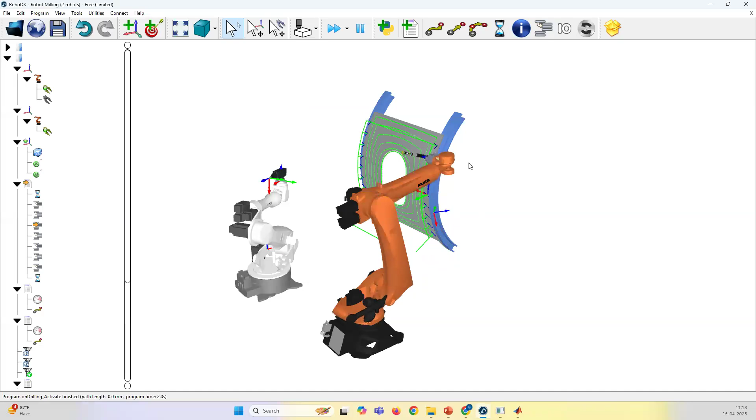These are some industrial applications. If I run this program, you can see it is doing a kind of painting operation. It is not sync painting.

If you see that color part, some kind of camera image process is going on. These are actually predefined programs. This kind of stuff you can easily show in the classes, so that everyone will be able to understand what is going on.

This software follows a step by step procedure. All the details are available on the YouTube channel of RoboDK. You can easily learn how to program this and other stuff. This software is also very much helpful to directly connect to the real robot.

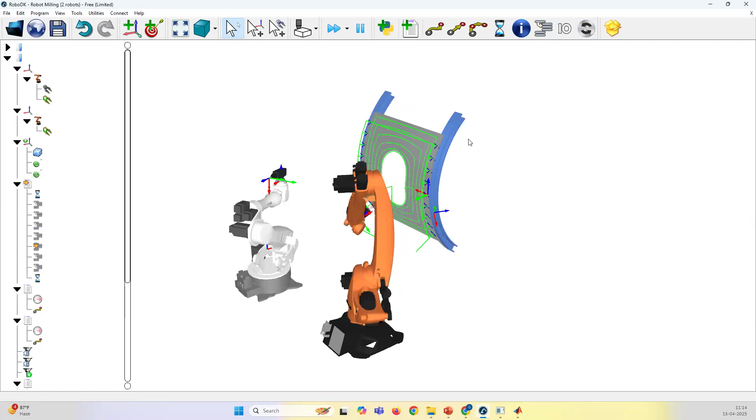Here you can see some kind of ethernet connections. With the help of that ethernet connection, you can connect this software to the real robot. So instead of using whatever programming language comes with the particular robot you purchase, you can generate whatever process you want and run it on that robot.

If you go to this particular website, once you click that link, it will directly take you there. Here you can see lots of brands and whatever industrial robots you want, everything will be available. You can easily download it and see how it works and other steps.

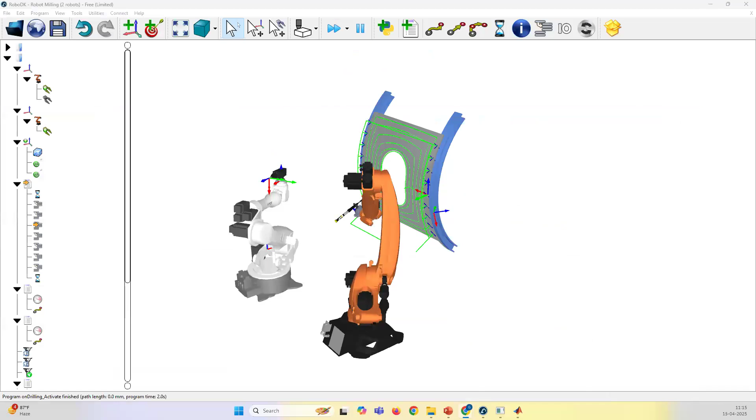Now we'll start with the robot kinematics part, why it is necessary and important. I hope all of you know the basic kinematics part. Kinematics is nothing but studying motions, regardless of the forces acting on them. In robot kinematics, it means studying the motions of robotic structure without regard to the forces that cause it.

It is very much necessary to understand how these motions affect the overall conditions of robotics operations. Before developing any robot, you have to understand how the robot's motions will happen. It involves mostly calculations of positions, velocities, and accelerations of each element, because a robot consists of some kind of links and joints.

It consists of links, joints, and has some kind of end effector. That is the most important thing. You have to understand how these links are moving from one position to another, how they are interconnected, and why it is necessary to understand the motions of that particular robot structure and how it will move.

This is essential for understanding how each joint and link contributes to the overall motion of the system. Then it will help you work with the control framework. Once you know the kinematics, you can derive the control algorithms out of that - you can develop the dynamics of robotics, then go for the control aspect.

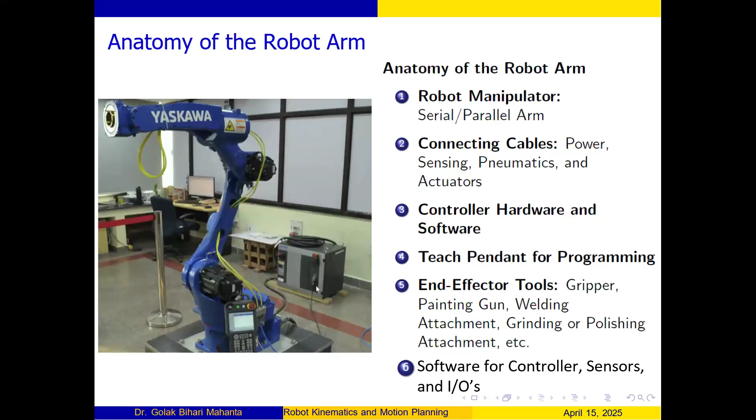So next, mostly these particular robots and everything come under this ISO - ISO 9946. Under ISO 9946, different ISOs are there for different aspects. So one is 8373.

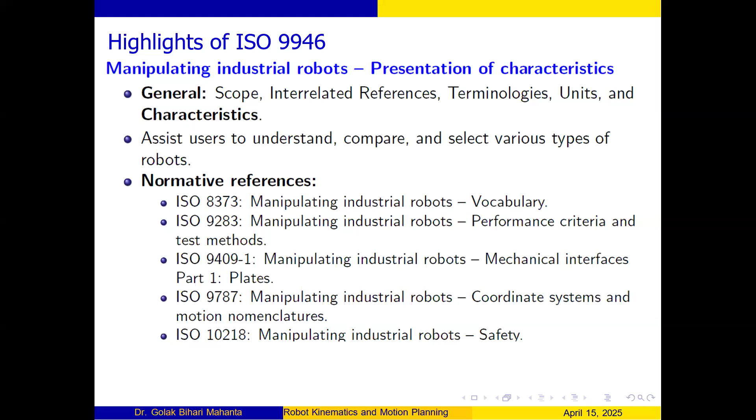All these related industrial robot definitions, all this vocabulary related to robotics, are put in this ISO 8373 standard. Just keep this part in mind.

The next most important thing is, when you purchase an industrial robot, it comes with a data set, and this is the most important thing to understand. You have to understand each and every component of this data set, then only you can understand what is happening in the industrial robot scenario.

So what is the meaning of this payload? The payload is nothing but the maximum weight a robot can lift in all possible configurations within the specified workspace.

If you see this industrial robot, it holds this particular object in different configurations. Whatever all the possible ways it can hold, it's not that if it can hold 30 kg here, then in another configuration it cannot hold that 30 kg. That's why all possible configurations in the specified workspace matter.

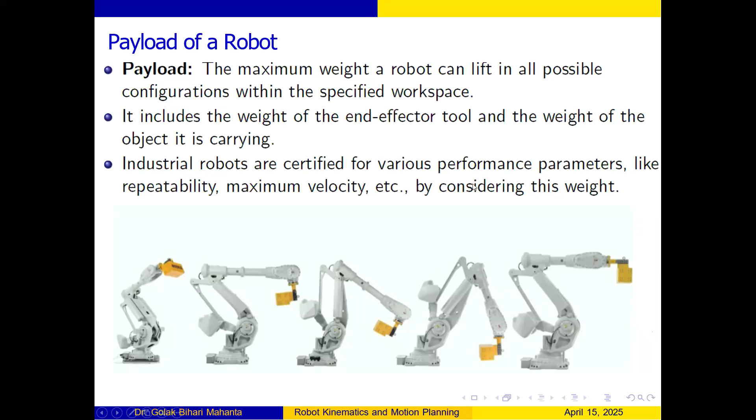Next is another thing called supplementary load. This is also mentioned in some cases. In this particular case it is not mentioned, but this supplementary load is also very necessary, and it is also defined in the particular data set.

If you add load elsewhere, what will happen? You cannot get the full potential of the robot, and some issue may happen.

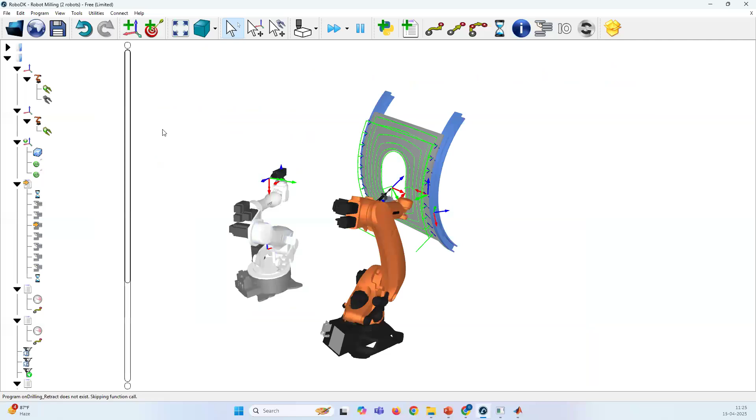Let me go to this station. If you see, this is the number of axes. Here it has 6 axes. This is my first axis, if you see this.

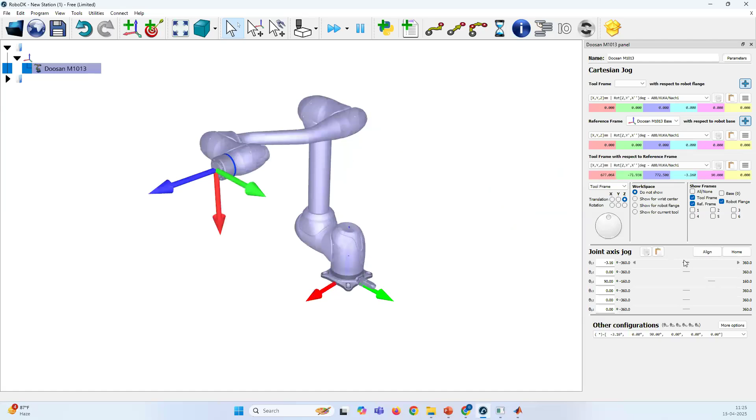This represents RGB, meaning red is your x axis, green is your y axis, and blue is your z axis. The first joint is at the base, and it rotates with respect to the z axis. This is the first axis or first joint, because this is an articulated robot arm, all joints are rotary joints, and a rotary joint has 1 degree of freedom.

Rotary joints have 1 degree of freedom. If you imagine any object in space, it can have maximum 6 degrees of freedom, meaning three directional linear motions like X, Y, Z and three rotational motions. For a rotary joint, the remaining five degrees are constant, so a rotary joint only has a single degree of freedom.

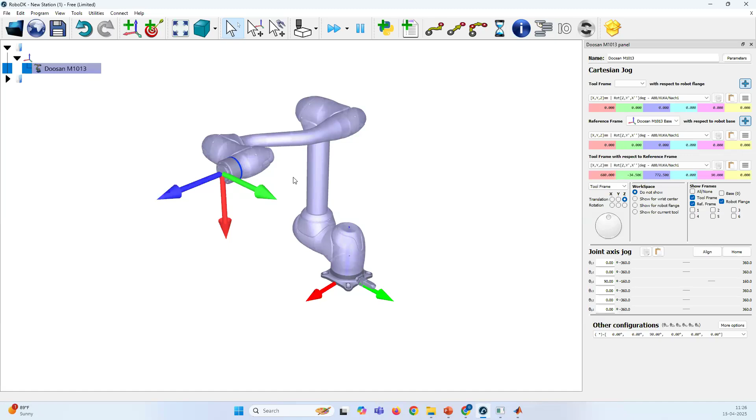This is my first axis, this is my second axis. It rotates with respect to either the y axis or this rotates with respect to the x axis, and so on for the third, fourth, fifth, and sixth joints. Each joint represents one degree of freedom, so this is a 6 degree of freedom robot because six joints rotate independently, irrespective of each other. If I rotate this joint, the other joints don't move, because we are in the Cartesian frame. That's the degree of freedom part.

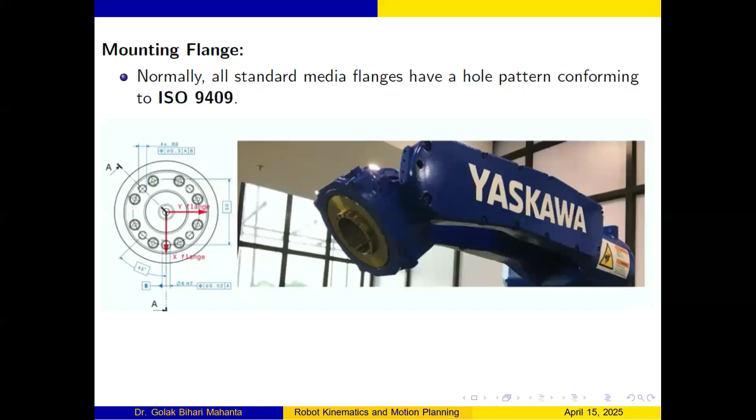Next we'll discuss the mounting flange, which is also one of the most important things. This follows the ISO 9409 standard. Whatever robot you purchase, if you look at the end effector part, it has to follow this ISO standard, because robot manufacturers usually don't develop the end effector themselves—different companies make end effectors. Those who have robotics in their lab can experience this. They have to follow the standard so that whatever end effector you use can attach to this particular flange. Everyone has to follow ISO 9409 when developing this.

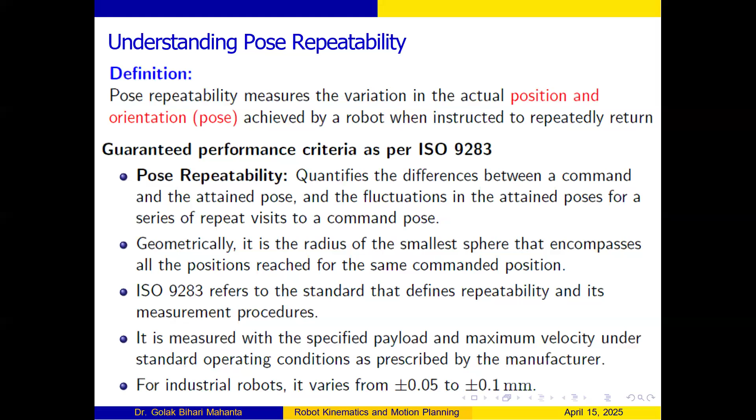Then the next important thing is called repeatability, or pose repeatability. Pose repeatability measures the variation in the actual position and orientation achieved by a robot when instructed to repeatedly return to a particular position. Imagine I want to take my robot to a position XYZ where the target is 100, 200, and 300. It has to reach that point, but initially, on the first iteration, it might reach 99.9 mm instead of 100, 201 instead of 200, and something else instead of 300.

In the second iteration it reaches another nearby point, and in the third iteration another nearby point. So it's continuously reaching nearby positions. If you take a small radius around all these end effector positions, they will form a kind of sphere. The minimum radius of that sphere, covering all these reached positions, is nothing but the pose repeatability.

This measures how accurately the robot can reach a particular position, so every robot comes with a repeatability specification. For example, for Fanuc, the repeatability is plus minus 0.05. Lower this value, the more accurate it is compared to a higher value. This is pose repeatability, one of the other important aspects of this subject.

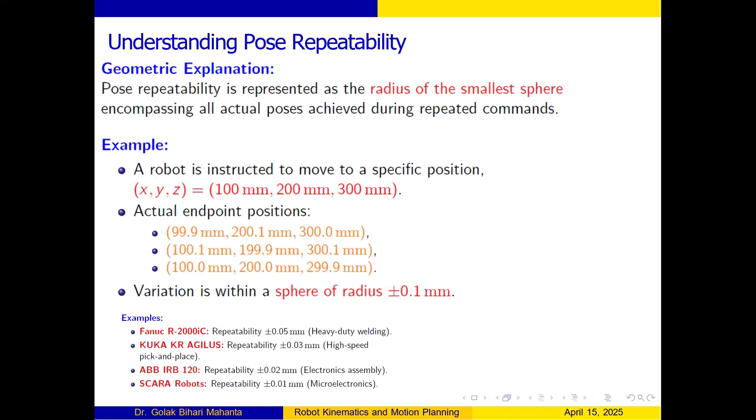The next thing is called mounting position, which is also defined in the specifications. You cannot mount the robot haphazardly—whether you mount it in a vertical position, horizontal position, on slotted devices, or in some other application, this is also mentioned in the specifications.

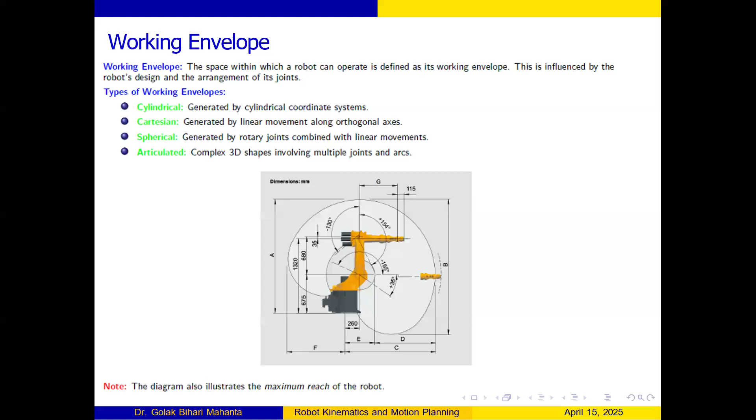So if you see here, some constraint will be there. Here it is a kind of cylindrical work envelope developing, and at the back, due to the physical limitation of this robot, you are not able to reach the back side. Physical restriction is the most important thing, because the joint is like your hand, which is also a kind of rotary joint, so you cannot take it to the backside.

If you cannot close it properly, maybe it can navigate from 10 degrees to 180 degrees. If you take it to the backside, it will break your hand. So that restriction is very important - physical joints cannot do this thing. So let me show this particular simulation again.

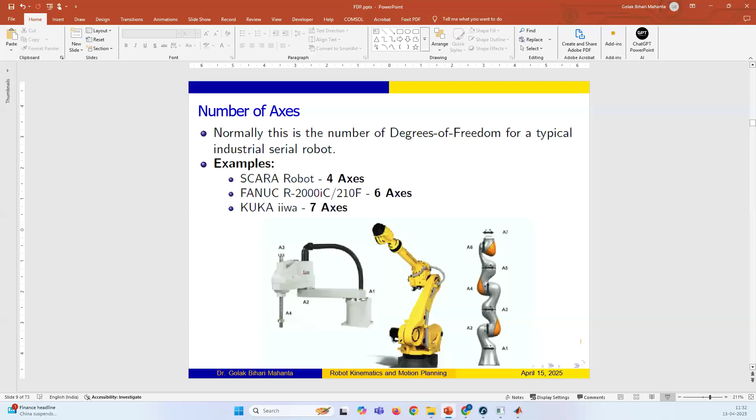So this is a 2 degree of freedom robot. If I say what is the configuration space - for all values of theta 1 and theta 2, what space will be generated, the end effector will be going to generate what is the maximum work envelope or work space it is generating.

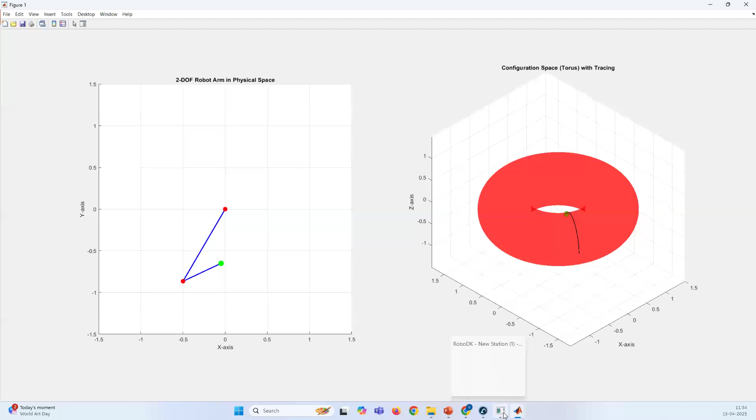So I'll stop it here. In this case, it will generate this kind of shape for this particular robot. How do you do that? While you code that in MATLAB, you have to take the physical parameters of each of these things, develop the forward kinematics equation, give the loop, and you can plot that tracing part, so that you can easily get that.

Next thing will be the key differences between work envelope and work volume, because it's always a kind of confusing thing. In interviews they often ask what is the difference between work envelope and work volume. Work envelope is nothing but a kind of two-dimensional space, the maximum it can reach with no restriction at all - a geometric shape defining the boundaries, typically visualized in two-dimensional space. All the reachability boundaries can be denoted by this work envelope. But work volume is the three-dimensional or operational space within the boundaries.

So if we develop the overall work envelope, I can say that it's like a kind of circle shape. But the work volume will be exactly like this.

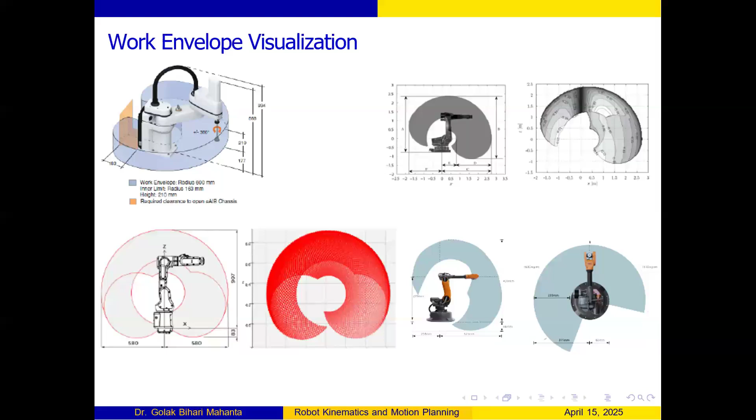This is operational capacity. Next, you have to understand all these particular specs are rated by ISO 20653, that is for your ingress protection. Means if you see ingress protection rating like IP65, while you go to buy anything, this is a kind of waterproofing condition.

So in this particular case they follow IP65, meaning totally protected against dust, because a lot of dust and other stuff will be there, and some protection against low pressure water jets from any direction with limited ingress. So it means you cannot put that underwater, but different kind of actuators can go for underwater application, though they have to follow different ingress protection.

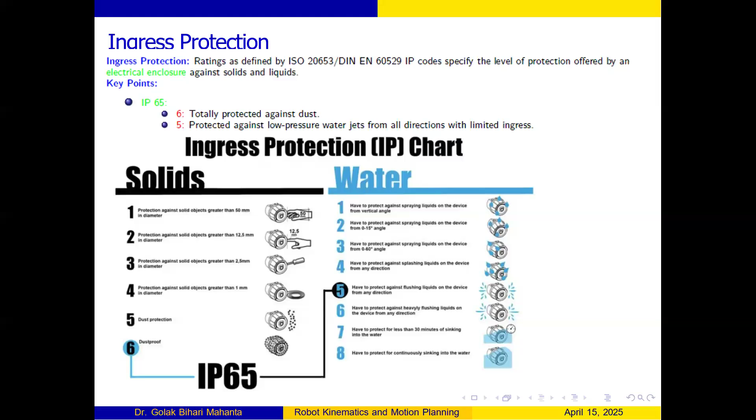This IP65 they have to follow, and depending upon the motors and other stuff, they can go for different IP ratings, similar to your smartwatch, where they say waterproof IP6, IP7, IP8. So this is for both solids and water, you have to account for both.

Next thing will be your axis data. Axis data is nothing but each joint going for both positive and negative parts. Like if it's moving clockwise you define positive, if anti-clockwise you define negative. So you have to specify in which side plus and minus everything goes.

And you have to calibrate each and every joint whenever the robot comes, like this is my joint 1, this is my joint 2, then you have to calibrate these things before making it run, so that there will be no issue.

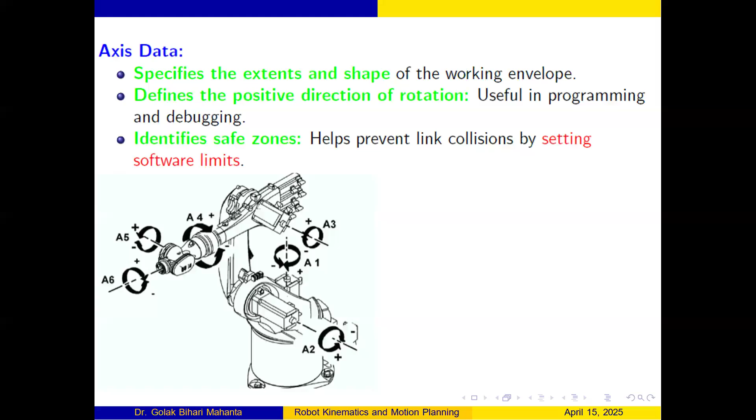Next, this configuration space we already discussed and visualized. Configuration space is nothing but where is that particular thing, where is your robot. You have to know that in detail. Just imagine a door, if you're going to open that door, what variables do you need to define the position of that door?

Maybe 0 degree means it's closed, 90 degree means it's open. So in that case you need a single variable, that is your angle. So this configuration space is nothing but the angle of the hinge, the angle about its hinge.

Then just imagine a point. How do we define a point? To define a point we need x and y only, so much in x axis, so much in y axis.

But if it's an object in a two-dimensional plane, you need x, y as well as another theta value for how it's oriented. Then if it's in a three-dimensional space, you need x, y, z as well as theta 1, theta 2, theta 3 - three positions, three orientations.

Similarly for this planar robot, you can define it in the form of joint angles theta 1 and theta 2. Same thing for this particular robot's configuration space - for these two joints it's s1 and s2. This forms a torus. For theta 1 it's configuration space s1, and theta 2 another, s2. Both together make a torus.

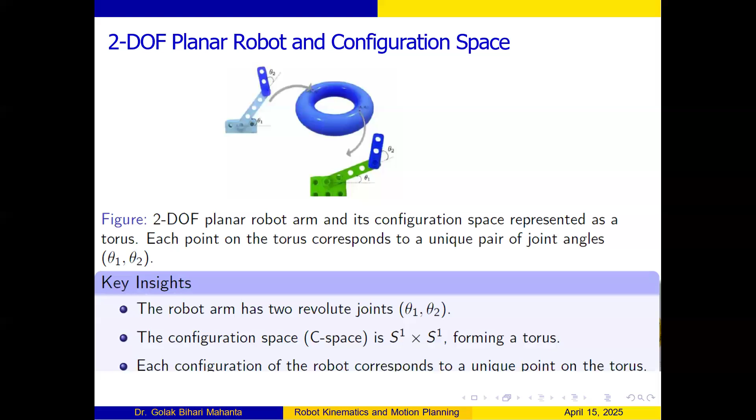Then what are the components to develop the configuration space? Degree of freedom is the first thing. Degree of freedom is nothing but the number of independent parameters required to uniquely define the configuration of the system.

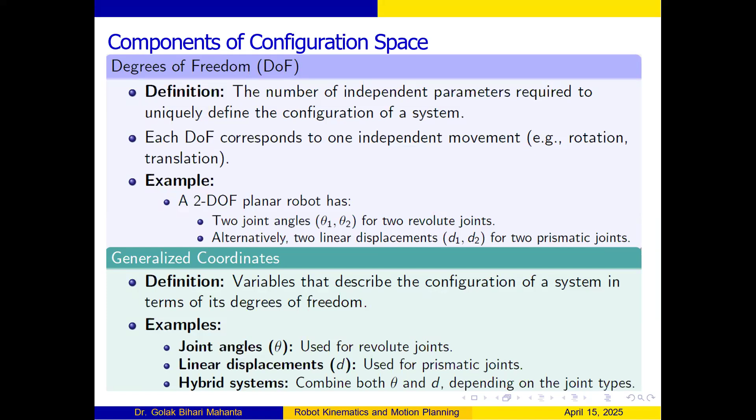This is another thing interviewers usually ask about in detail. They go into the depth of this particular degree of freedom topic and try to extract as much as possible, so let me show you each and every scenario.

These are the types of joints generally used in various scenarios. One is the revolute joint, denoted by R. Then the prismatic joint is P. The helical joint is H, also called a screw joint because a screw will be there. Then cylindrical joints, which have no screw at all. Then universal joints and spherical joints.

The revolute joint's degree of freedom is one, because it only rotates with respect to the axis where the joint is placed between two links. Then there are prismatic joints and helical joints. This is the most commonly asked question - the helical joint's degree of freedom is also 1.

For the revolute joint, degree of freedom is 1, meaning it independently rotates in one axis only. It cannot rotate in any other axis, whatever that axis may be. Suppose you put that joint vertically - let's see what that means.

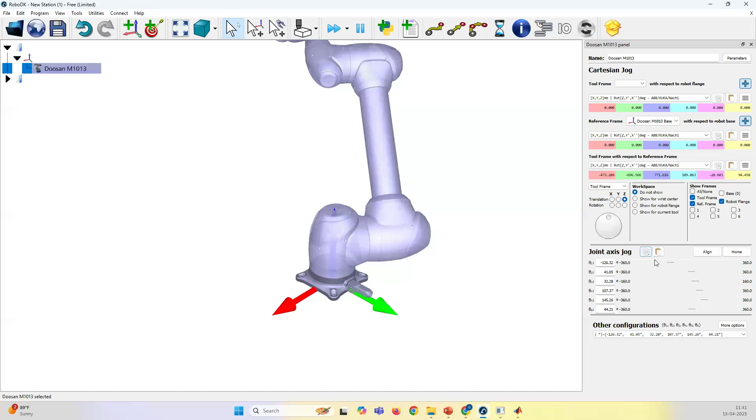This is a rotary joint. If you see here, it is placed with respect to the z-axis, so it rotates only with respect to the z-axis, not any other axis. This particular joint, shown in red, is the second axis, and it rotates with respect to the x-axis. It cannot rotate anywhere else - you have to understand this very clearly.

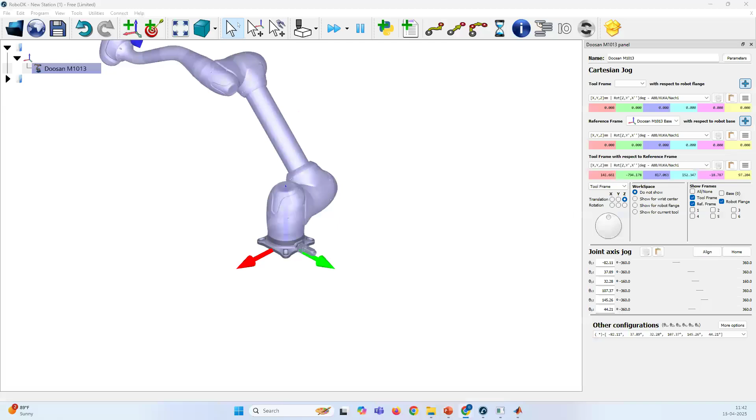Let me show you another scenario. Let me go to this website to see how we do that. Suppose I want to work with 4 axes - if you see, there are different robots available. I'll add one, maybe a Scara robot or something. I simply download it or directly open it. So, open in RoboDK - it will open, and this is my robot.

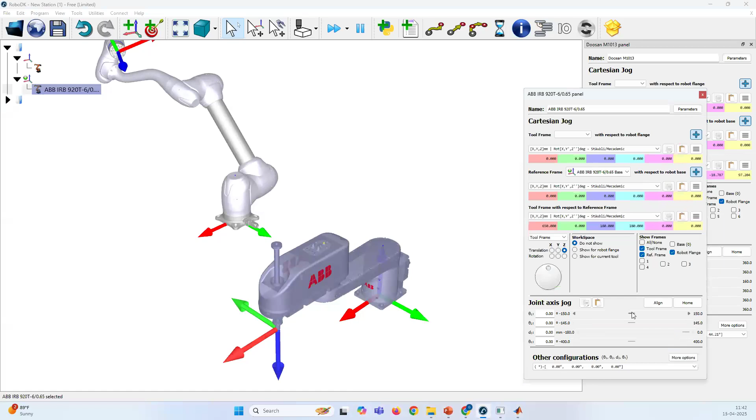In this case, let me click on this - this is my robot, and it has 4 axes. This is my first axis, this is my second axis, theta. But if you see, what does the third one have? It is which kind of joint?

This could be either a cylindrical joint or a helical joint. Mostly it's a helical joint, but since there's some kind of screw involved, what happens in helical joints? The degree of freedom is 1, because independent motions aren't available - the thread has minimum pitch. So if you rotate once, it can travel up to 1 centimeter, that's the minimum pitch, so independent rotations aren't possible.

That's why this is called degree of freedom 1. Everyone remember, helical joints have degree of freedom 1, and you can easily demonstrate that. The fourth and last one is the end effector part, which is again a rotary or R kind of joint - this is why the degree of freedom concept is very important.

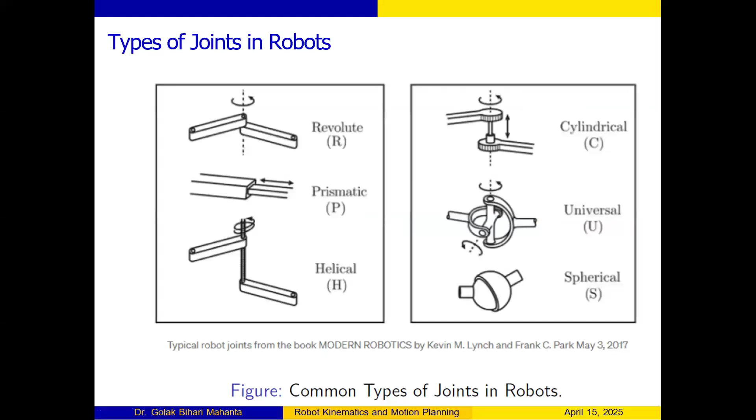So the next thing will be, let's go through that. I already defined the links and joints and the other stuff, so you can go through that.

Next thing is how to find out the degree of freedom. In robotics, we generally use Grubler's formula to find the degree of freedom. It is denoted by m into n minus 1 minus summation of ci or fi, whatever you want to call it. So m depends upon which plane you are doing - either a two-dimensional plane or three-dimensional plane. If it is a two-dimensional plane, we need minimum 3 parameters to define that thing, so m becomes 3. n is the number of links, and j is the number of joints.

Here another stuff will come in. In this case, ci is the constraints imposed. If you put the constraints imposed, the j part will also come in, so the expanded formula will be this one: n minus 1 minus j, summation of fi, meaning independent degree of freedom - this is the summation of the degree of freedom of each and every joint.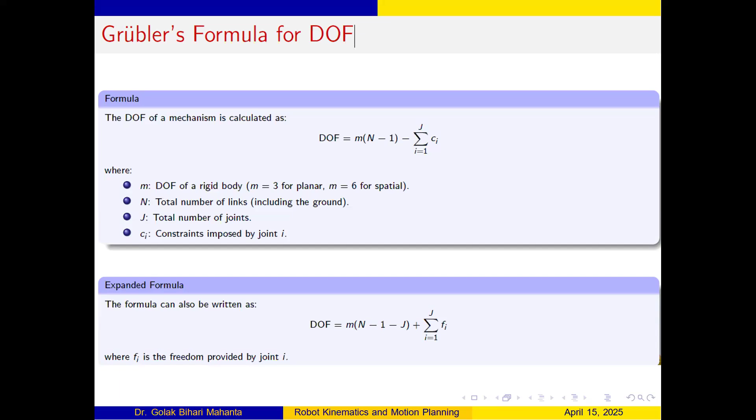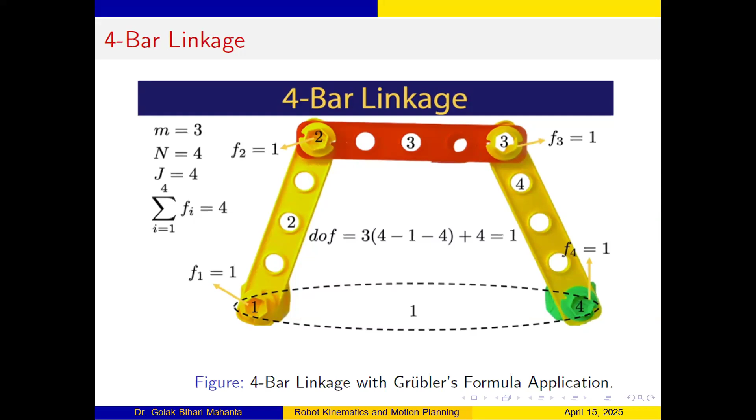Next thing, this is another theory of machines question, like a 4 bar link mechanism. Here how many links are there? The base is one link, second link, third link, and fourth link. How many joints are there? One, two, three, four joints, and all joints are revolute joints, so 1 degree of freedom each. The summation will be 1 plus 1 plus 1 plus 1, which is 4. If you put that in the formula, you get the degree of freedom equal to 1.

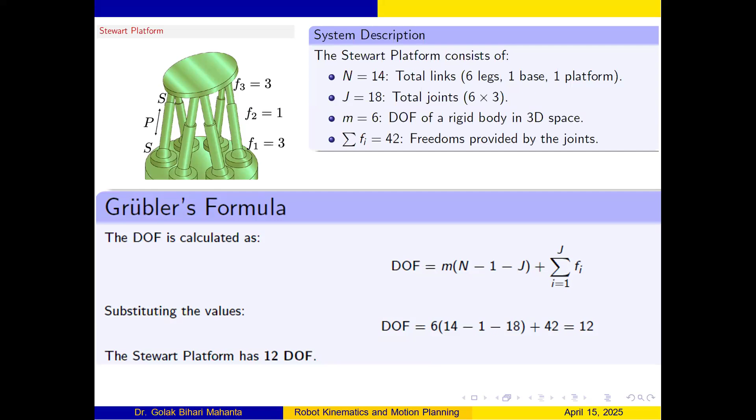Next we're going to discuss the kinematics part. In robot kinematics, mostly two kinds of kinematics are there. One is called forward kinematics, second is called inverse kinematics. Forward kinematics is to find the position of the robot, then inverse kinematics is to find the position of the joint angles.

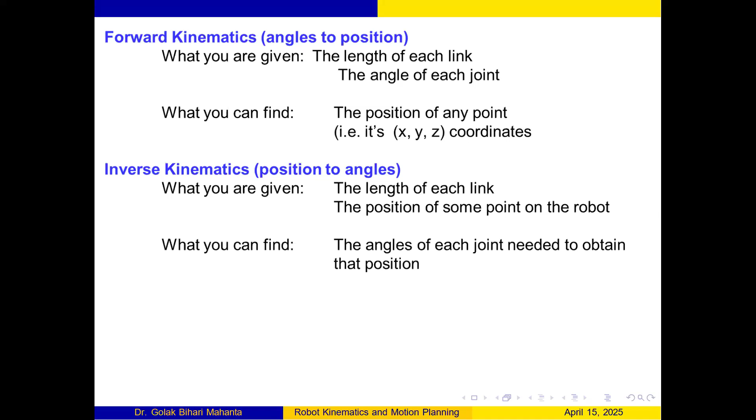So in the forward kinematics equations, you have to find x, y, and z, and your known conditions will be length and angles. But in inverse kinematics it is the other way around. So how do you find this particular thing?

You have to first know about all these parameters, then find out the DH parameter representations, because next will be finding the kinematics equation. Then you can easily, once you multiply each transformation from 0 to 1, 1 to 2, 2 to 3, and so on, find the final end effector position and orientation.

So it will come out as a 4 by 4 matrix. Out of that 4 by 4 matrix, the 3 by 3 matrix will represent the orientation, and the position will be px, py, and pz.

So in the DH parameter algorithm, first, this is mostly used for industrial robots and was developed around 1955 or so. Later, advanced methods came, like screw methods and exponential equations methods which we generally use now, but till now for teaching purposes we mostly follow this DH parameter notation. This is also there in the syllabus of engineering services examinations, the DH parameter part.

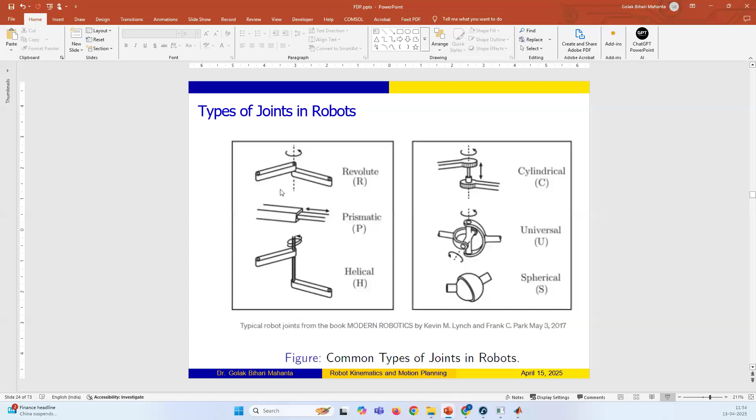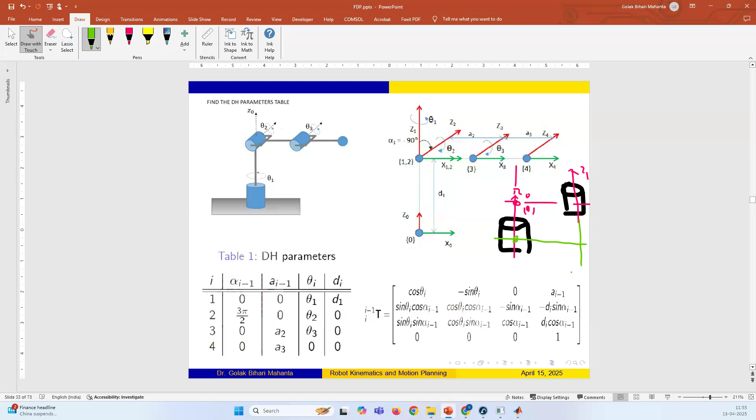You have to try to remove this mistake. A lot of people make this mistake, so you have to understand that this particular reference point should be at a joint. Instead of doing that, you extend this position like this, extend this position like here. This is my reference point. If we take this reference point here, then you can easily see it is at one joint. This is a basic mistake a lot of people make while assigning the axis.

Similarly, in the second scenario, let me go through with my mouse. In this case, this is my Zi going like this, Z i plus 1 is like this. So at which joint is it? It is at the zi plus 1 joint. But even though it is at the zi plus 1 joint, you have to locate oi here. Oi means whatever the zi value is. Suppose this is your z0, this is your z1, then this particular point will be your o point, meaning the 0 point. This part will be the 0 point.

Don't assume that because it is in one line, the z1 line, you should write it as one. It will always be between the previous and the new one. If it is z1 and z2, this point becomes 1, because if it is z2 and z3, this point becomes 2 when you do the numbering. Similarly, you can go for the other one.

So if it is parallel, you have to draw a common normal and put the point in that common normal. Then if both are collinear, you can put it anywhere, but try to put that at any of the actuators or the joints.

Once this is completed, you have to assign the x-axis part. One case is when both axes are intersecting with each other. If intersecting, you find the plane created by the intersection, and it will be perpendicular to that line. So if you see this axis and this axis intersecting, it creates a face here, and you draw a line perpendicular to the face.

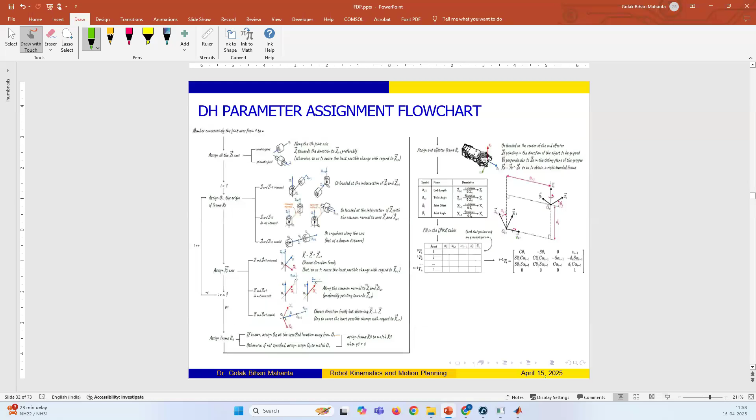The twist angle is nothing but - I'm going to show you, because a lot of people get confused related to this twist angle. So what is the meaning of twist angle? This is a valid point, it is like an initial... yeah, so this is the twist angle part.

So twist angle is nothing but, this is one joint. This particular joint is arranged vertically, this is arranged horizontally. So what is the angle between these two things? If you see, imagine the angle between these two things is 90 degrees, but you have to follow the right hand thumb rule. You have to check, if I rotate this particular axis, how much angle it will take to make it parallel to this one. That much angle, and it is an imaginary kind of thing.

Don't think of it as something different. Whenever you go to purchase, fabricate, or create this, you have to decide by yourself how the joints are angled.

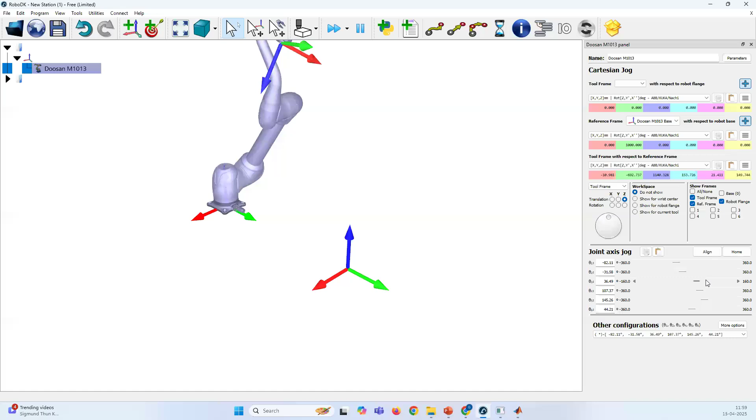In this case, joint 1 and joint 2 have twist angle 90 degrees. This is my joint 2, and joint 3. So here, the twist angle will be how much - both are parallel to each other, so twist angle will be 0. It is not rotating.

So if you see, even if I bring this here, this is my joint angle 2. So both of these joints are parallel to each other, which means your twist angle will be 0.

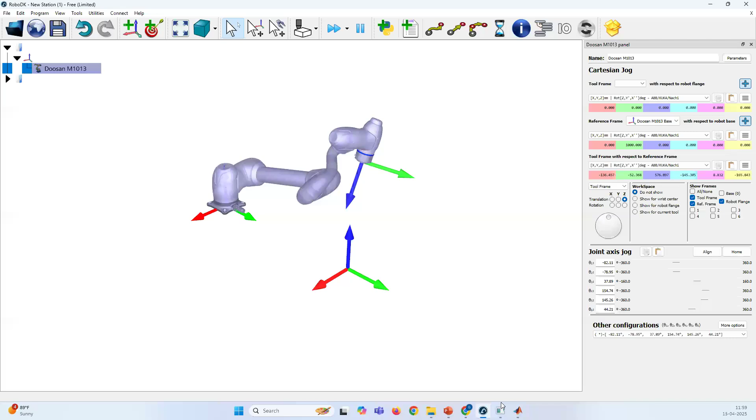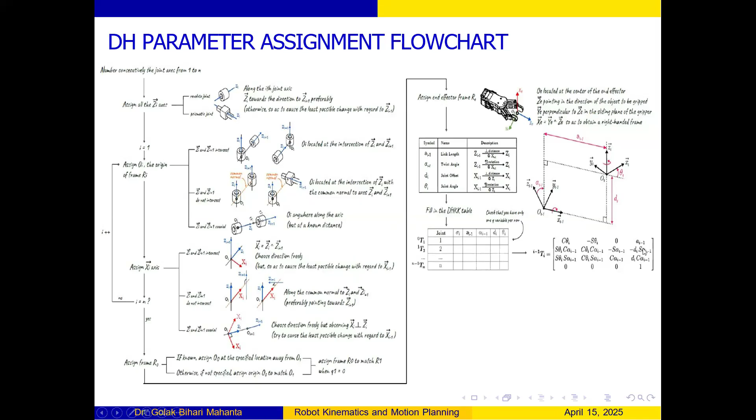From each and every table, you can get, like, from 0 to 1, one transformation. You will get one transformation like this. In this case, this is a basic RRR configuration part.

Once I did everything, I gave z0 here, for the base point where the robot will be placed - you have to put that robot in some place, so that is z0. And for this particular blue color part, I gave this as z1, and it is, you can extend up to this point.

For this second joint, this is Z2. For the third joint, Z3. And the fourth point is nothing but there is no joint at all, but I can show that for the end effector I just draw that Z axis for Z4.

Once this assignment of Z is completed, you have to assign the origin points. If Z0 and Z1 are collinear, I can write the point here, point 0. Then for Z1 and Z2, they are intersecting, so point 1 is here. Then Z2 and Z3 are both parallel, so if I draw a line there, point 2 is the starting point here. Between 3 and 4, the starting point is 4, and the fourth one is our point. So this point assignment is completed.

Then you will draw the x-axis. This is my Z0 part, so I can write one axis here. Between 1 and 2, this is making a plane, so x1 will be like this. Between x2 and x3, directly you can draw x2 here, then x3 here, x4 here.

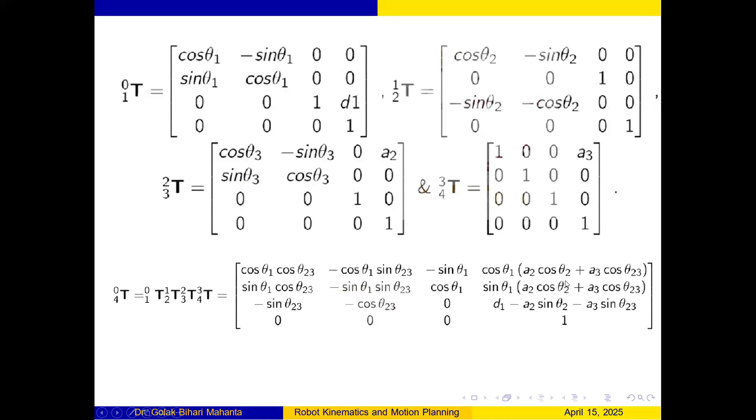So this is nothing but the forward kinematics value. Using this particular forward kinematics value, you are able to develop the workspace also.

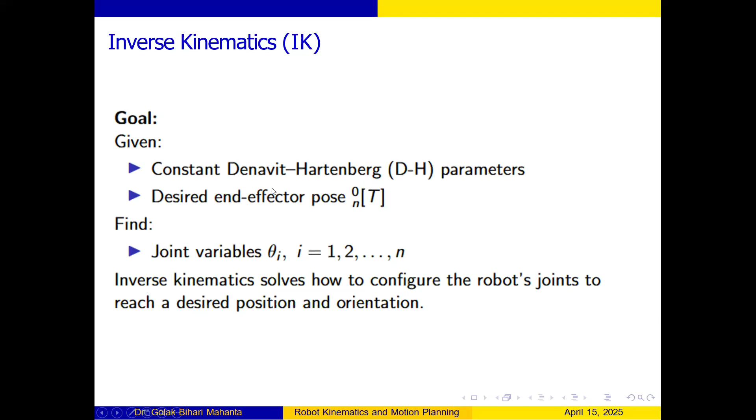Then the next thing is the inverse kinematics part. In this particular case, we have to find out the joint angle, provided your x value, y value, z value, as well as link length will be given. So you are able to find that.

And for different applications, necessary things like path planning, pick and place, and other stuff will be there. Then how to find different solutions will be there.

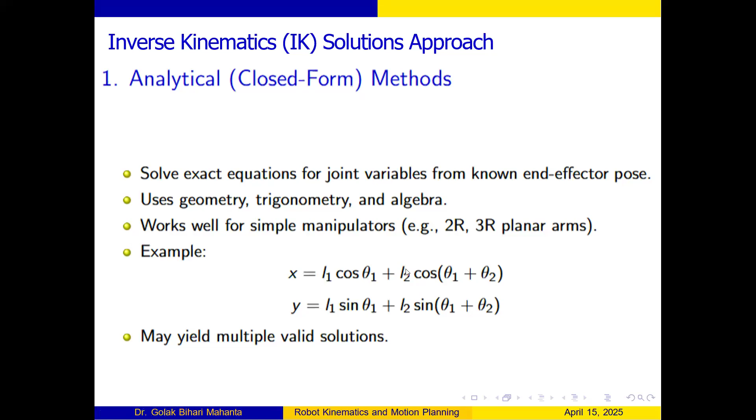So one is the analytical approach. In analytical approach, how will you do that? You can solve these two equations. Here two unknowns, this is known, L1 and L2 known, theta1 and theta2 unknown. So once you solve this, you can get two values. One will be theta, and the other you get from cos inverse of this.

But in this case, we get two values for each, theta1 and theta2. If you see, like cos 90 degrees, cos minus 90 degrees, 45 degrees, minus 45 degrees, we are getting two corresponding values. This is my bottom kind of condition. So in this case, if I draw like this, another condition I will get.

So that's why multiple values will be obtained in inverse kinematics. That's why the inverse kinematics part is very complex. For particular applications, if you want to develop some robot or something, there are a lot of papers or research articles you can get, with lots of people focusing on different approaches to solve this. These are the standard kinematics parts.

Then some pros and cons I mentioned. Exact closed form solutions, very fast computation you can do, suitable for real time control. But it is not applicable for complex geometries because it is very difficult to develop for complex geometries.

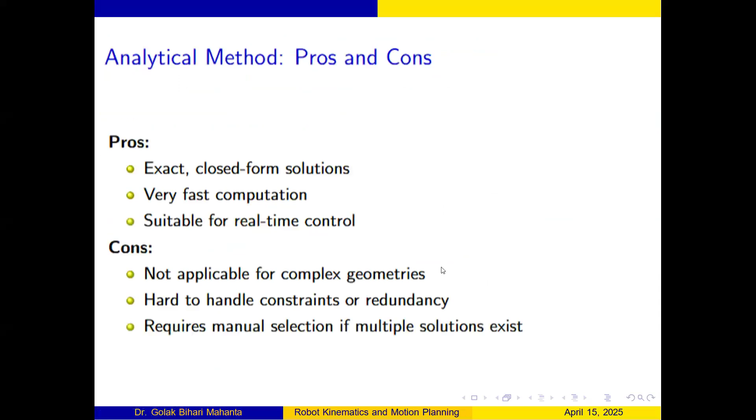And then next is iterative methods, or numerical methods. You have to use some kind of form called Jacobian based approach. We're going to discuss what this means. And then Jacobian method or Newton-Raphson method. Any mathematical approach like iterative numerical methods you can use here, numerical mathematics you use to study, that approach you can use.

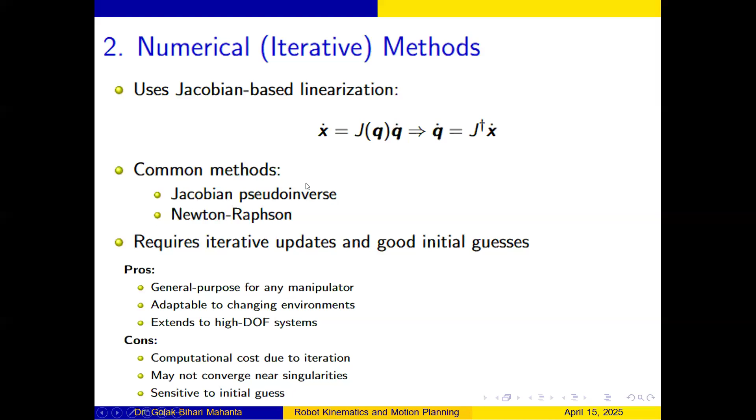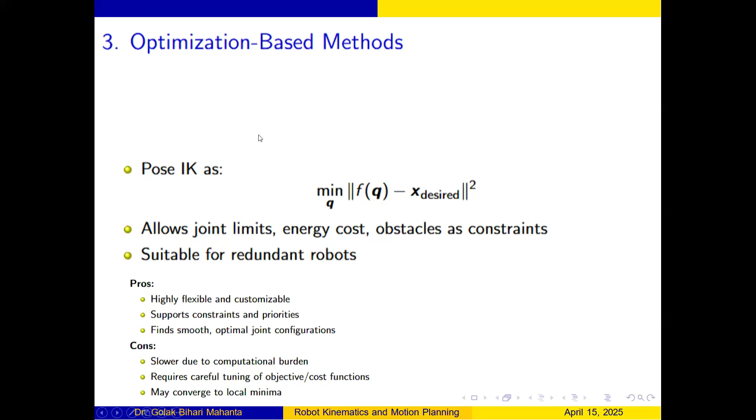Then there's the optimization based method. In this case, you already know the forward kinematics value, then whatever the desired value you are getting, you have to minimize that with respect to some optimization method. So you have to develop an optimization function, then you can minimize that using any of the methods.

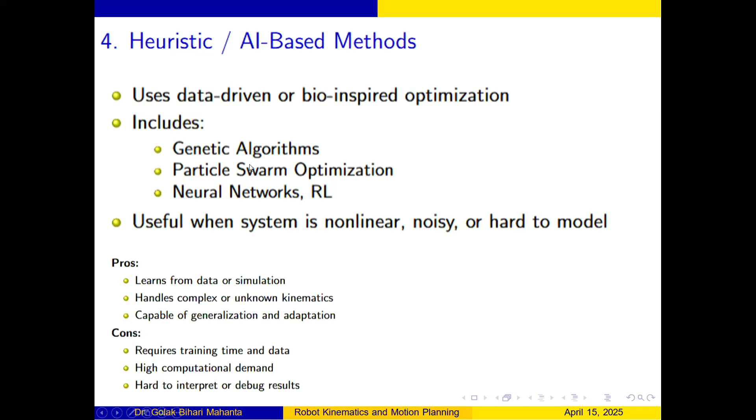Then some kind of heuristic or AI based approach will be there, like genetic algorithm, PSO, and lots of papers. You will get a lot of papers based on these AI methods and other stuff, so you can explore that part.

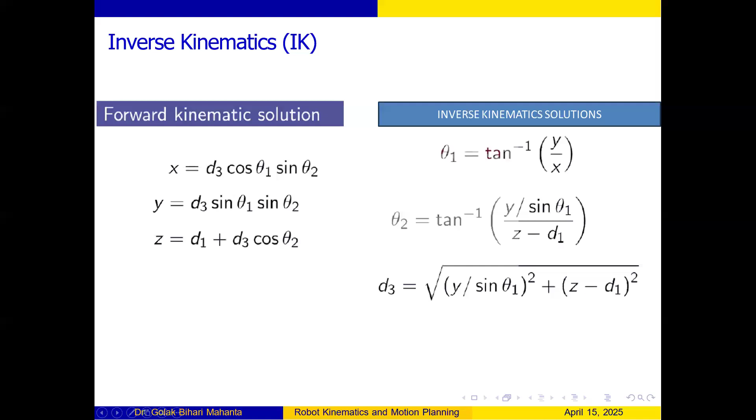For the inverse kinematics part, again the same thing you have to follow to find out the forward kinematics. Once you complete that part, you will get px, py, pz. Based on this particular data, this is nothing but my x, y, and z position. From this forward kinematic solution, I can compare this value and get theta 1, theta 2 value. D in this case is D3 value, because this is theta 1, theta 2, and this value will be D3, your R and prismatic configurations will be there. So in this case, you can find the inverse kinematics part.

So the next important thing is called the robot Jacobian. What happens is each and every joint will be having their own theta one, theta two, theta three, theta four value. But the end effector position will be x, y, and z.

So whatever joints are there, each joint will have its own velocity, and due to that velocity your end effector will go from one position to another position. So imagine the joint rotating at, suppose, radian per second or degree per second, that's your velocity, but the end effector will be moving in the x direction at a meter per second or centimeter per second, whatever the case may be. So that's why it is very difficult to do that. What you have to do is map that joint velocity to the end effector velocity.

So that thing will be done by the Jacobian matrices. How do we do that? x dot is the end effector velocity, q dot is the joint velocity, and the Jacobian term comes here. So mostly it is used to map or relate the joint velocity to the end effector velocity. Similarly, it can do the mapping for force and torque, because if it is a rotary joint, the torque part will come, and if it is a prismatic joint, the force part will come. So it will map those things.

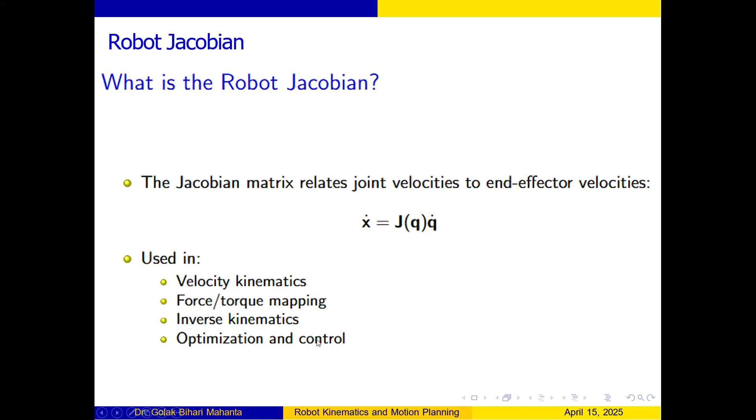Then it will be used for inverse kinematics also, as I already showed you. It is also very helpful for optimization and control. So how do you do that? x and y, this is a general geometry. In this case, your x will be xy and q will be theta 1 and theta 2. Then you have to take the partial derivative because they are not independent variables, both are dependent variables.

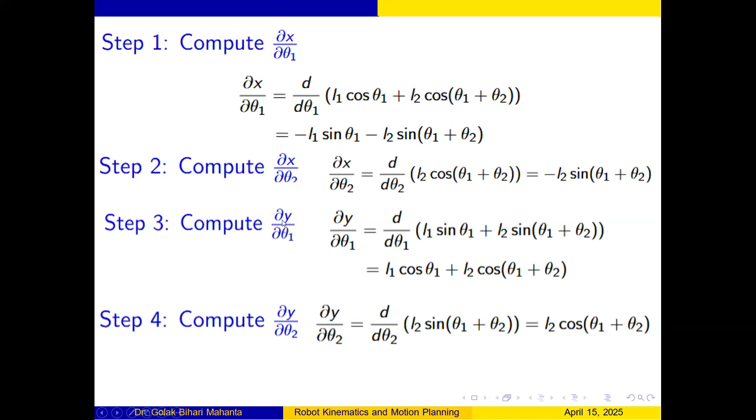So you have to do the partial derivative, once with respect to theta 1, once with respect to theta 2. Meaning dx by d theta 1 and dx by d theta 2, similarly dy by d theta 1, dy by d theta 2. Once you write these things, you will get this particular value. This particular thing is called the Jacobian, and if you see, this is nothing but a matrix.

So if you see, in this particular case I want to find out theta dot. Let's see, I just want to find theta dot in this case. So this particular relation is given.

So I can easily find q dot is nothing but J inverse of x dot. So if I know the x dot, the end effector velocity, and I find J inverse, then I can easily find the joint velocity. Joint velocity is nothing but theta 1 dot and theta 2 dot. So this J inverse is nothing but, how to find the inverse of a matrix, this is adjoint of J divided by the determinant of J.

This is nothing but your adjoint J divided by determinant of J. So whenever this determinant of J tends to 0, what will happen? Your J inverse value will become infinity. If this value goes to infinity, your velocity will become infinite.

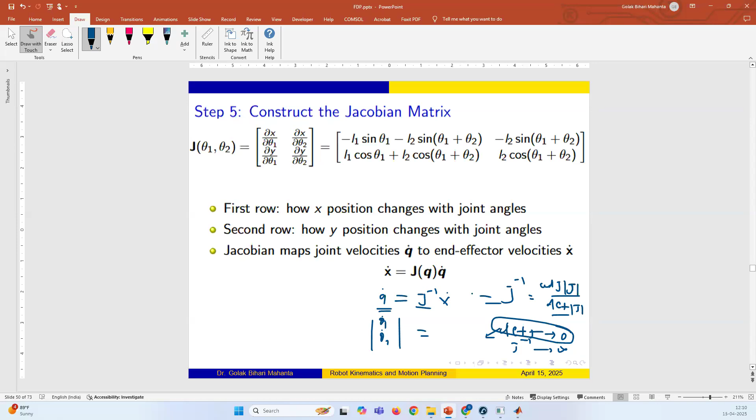So what happens? We have to find out the condition where this determinant of J becomes 0. Wherever the position or condition this determinant becomes 0, that condition is called the singular condition. This is also another important topic, and everyone is going to ask you this particular part.

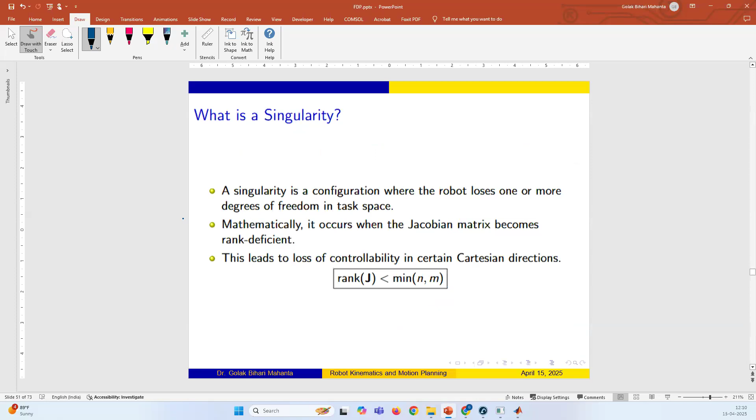A singularity is a configuration where the robot loses one or more degrees of freedom in task space. Mathematically, it occurs when the Jacobian matrix becomes rank deficient. Rank deficient means the rank of J is less than the minimum of n and m in Cartesian direction, or mathematically, the determinant of J becomes 0.

So if this becomes zero, the joint velocity cannot be uniquely computed. It becomes a kind of infinite stuff, very difficult to get a particular value. So as I already mentioned, small Cartesian motions require very large joint velocity.

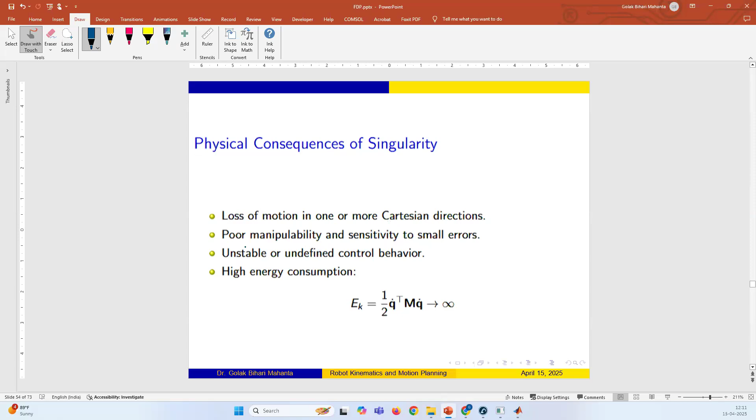If velocity becomes infinite, then your energy also becomes infinite. So this causes loss of motion, and high energy consumption will be required. So we have to find this value.

So how to find the singularity value? You have to find the Jacobian, then find the inverse of that. Once you find the determinant, you get L1 L2 sine theta 2.

Singularity occurs when this particular value equals 0. If sine theta 2 becomes 0 and L1 L2 does not become 0, then theta 2 becomes 0.

So if you see, this is my robot arm like this. In zero condition, this is my L1, this is my L2. In this particular configuration, this angle will be 180 degrees or 0 degrees, whatever you want. Either it can be like this, or reach in the back side if it is completely rotated. In these two conditions, singularity conditions will occur.

So for each and every configuration of the robot, you have to first find the singular point, and always try to avoid this kind of thing. Otherwise, in your motion planning or trajectory planning, you will not be able to do it properly. You will lose 1 degree of freedom, or even though your joint will be moving, your end effector velocity will not be moving. This is called singularity configuration.

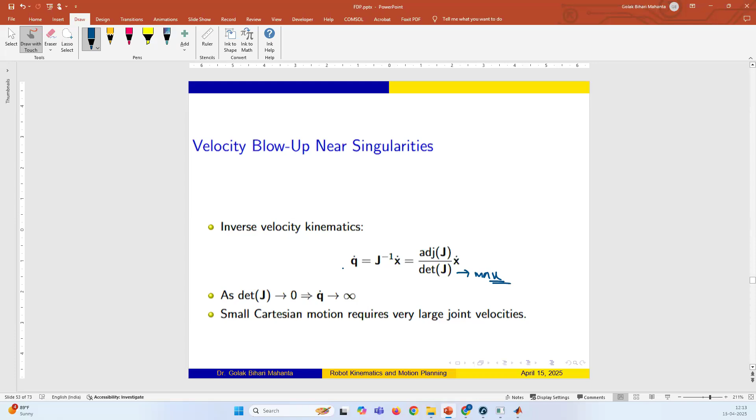So what will be the condition? Maximum means this particular value will be sine of 90, or sine of 270, or in that way it will keep going. It will be maximum at theta 2, maximum at 90 degrees.

So here what happens, you always want to work in this particular 90-degree kind of thing. In this particular workspace, you can able to work. Because if you see, while you're writing also, just imagine in your hand what is happening.

It is already an energy optimized condition. So if you completely flex your hand and write on the blackboard, it will be very very difficult, but after some amount of time you will feel discomfort continuously if you're writing. So what happens, you have to bend a little bit.

So while you're writing in your copy with a pen also, if you check your hand posture, it is a kind of optimal position. It's not exactly 90, but approximately 70 or some angle. That is the optimal condition where you can use less energy and easily continue for a longer period of time.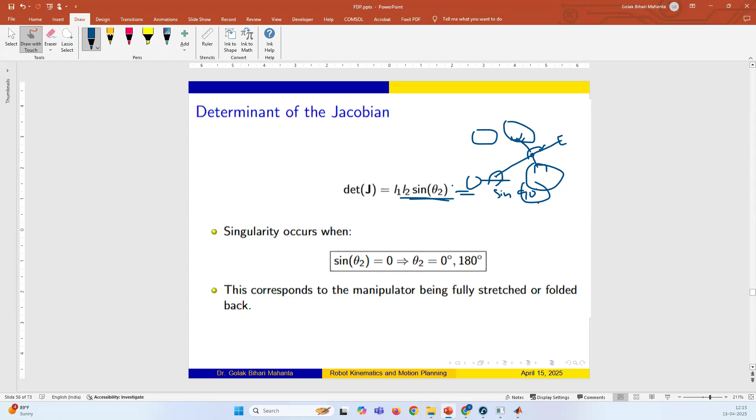But imagine while you're writing, you extend your hand and try to write in your copy for 3 hours. It is not possible at all. You are not able to generate the forces to write also.

So that's the condition for this one. Then different types of singularity will be there. Boundary singularity means the robot reaches the workspace edge. Posture singularity means two or more joints align with each other, the elbow will be straight. Wrist singularity means the last three axes of a 6 degree of freedom robot are aligned together. So this also they used to ask, types of singularity and other stuff.

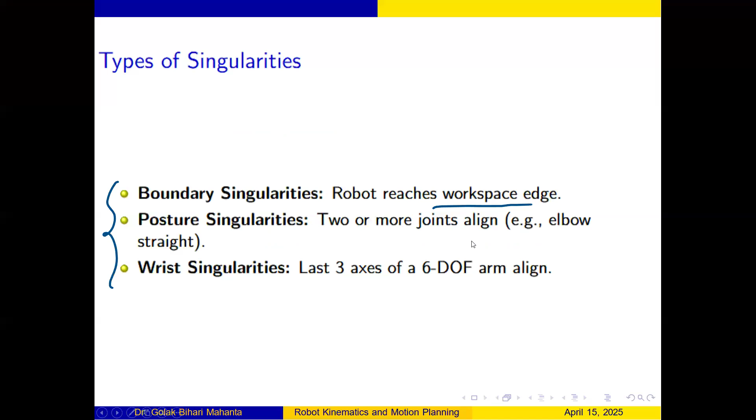Then next thing, we'll try to cover motion planning in the 5 to 10 minutes I have left. In motion planning, in layman terms, one thing has to move from point A to point B without creating damage to the environment. It has to follow from A to B without any deviation or hitting any obstacle.

That is motion planning. How a robot should move from one configuration to another while avoiding obstacles and satisfying all the required constraints. Why is it necessary? For collision free path, efficiency in operations, complex environments. The physical significance is smooth transitions, preventing sudden stops or jerks, ensuring mechanical reliability and productivity.

What are the main components we use to do motion planning? First is inverse kinematics. Second is path planning, then trajectory generation, then low level control. These four things you have to deal with to do motion planning properly for any industrial robot. For a mobile robot the inverse kinematics part may not be there, but you still need path planning, trajectory generation, and control. Inverse kinematics we already discussed.

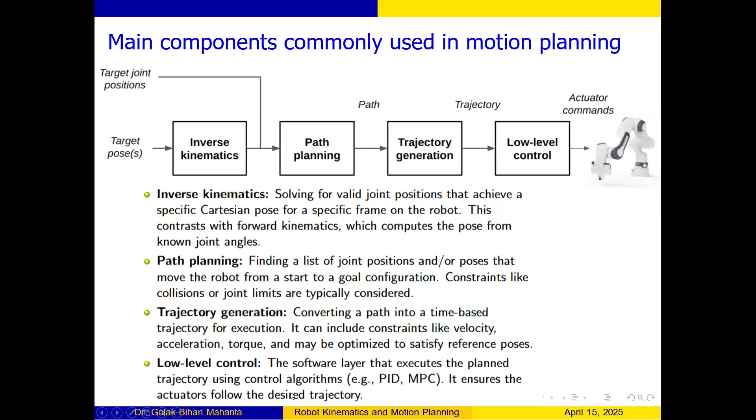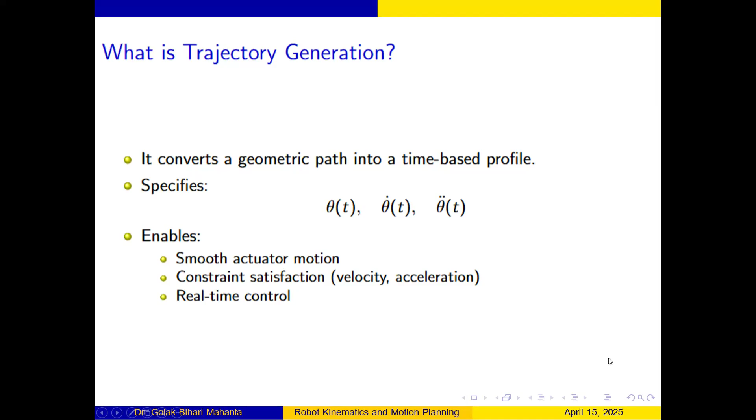Trajectory generation converts the geometric path into a time-based profile. So theta(t) is the angular displacement, the position of the actuators. Theta dot is the velocity of the actuators. Theta double dot is the acceleration. If you take one more derivative, theta triple dot, that becomes the jerk of the actuators. Why do we need this? We need it for smooth motion.

So next, let's draw this. Just imagine this is your robot arm. This will be my X and Y, and it is going to another point. This is my final point, this is my start point, this is my goal point.

It will go through intermediate points. So this is my X1 and Y1, this is my X2 and Y2, this is my X3 and Y3, and this is maybe XG and YG.

What happens is, when it is in this position, one theta 1 will be there, one theta 2 will be there. If you want to define this, it's called joint space configuration. So in joint space, I can define this as theta 1 and theta 2. In task space, if I define this robot, it will be called X and Y.

Similarly, for joint position 2, this is my second position, so one joint will be there. I can say theta 1, this is my point 1, theta 2 is position 1. Here this is my joint space, and this is my Cartesian space, XY and so on. Here X1 and Y1 will be there. Similarly, you can write this for each and every point.

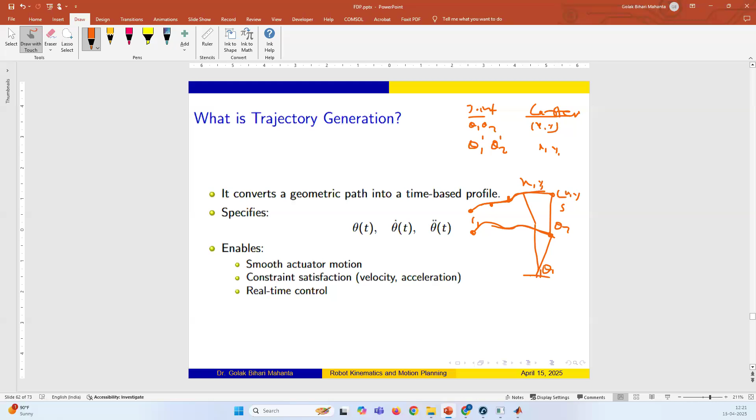Each joint consists of a motor. If it suddenly starts, what happens? Suppose initially it has zero condition, so velocity will be zero. If you suddenly give an acceleration of 10 or 12, you are definitely going to break that thing, similar to starting your vehicle. If you suddenly accelerate, or if you are in fifth gear and suddenly reduce the speed, then what happens? A jerk will happen. So in this case also, you're going to develop a jerk like this.

So joint space we already discussed. What is the meaning of joint space? It means theta 1, theta 2, theta 3. Then Cartesian space means x, y, z, and other rotational values called roll, pitch, and yaw. In the x direction, rotation is called roll, y direction is pitch, and z direction is yaw.

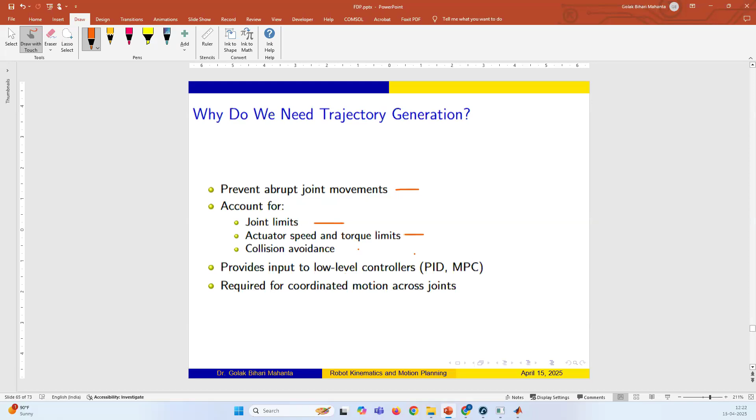Then why do we need this? We need this to prevent abrupt movements in the motion. Then joint limits, actuator limits, all these things we are going to develop. Different methods are there: one is the polynomial method, trapezoidal method. Different equations will be there because we have to develop these.

So if you go for the polynomial method, this is my general polynomial equation for position. I can write it in this way. If you see here, four variables are there: four coefficients, a0, a1, a2, and a3.

For a 3 degree polynomial, we will need four coefficients. If I go for a 4 degree polynomial, I need five coefficients. For a 5 degree polynomial, I can have six coefficients. So in this case, what will happen?

Four boundary conditions I have to give, meaning the initial position. Just imagine this is one trajectory curve, this is my t, this is my theta, this is theta as a function of t, and initially it may start and reach up to this point. So here maybe not this one, this one. Initial time equal to 0, and here time equal to tf.

So initial time will have some value, theta 0, and final some theta value will be there, that is theta f. Then at this initial zero condition, some velocity will be there, and that initial velocity will definitely be at rest condition, meaning 0. So theta dot will always be 0 initially, and when it reaches the final point, meaning stop condition, this will also be 0.

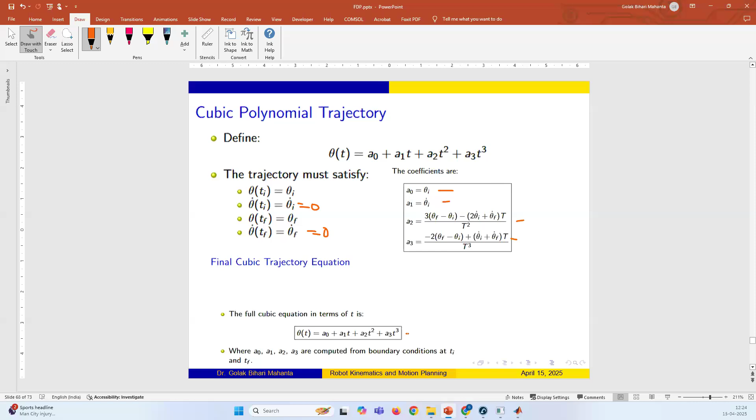So once you solve this condition, by applying it, this will be 0 and this will also be 0. By satisfying these, if you put them here, you get some value. If you put that, you get this kind of result. Once you get this, you can solve for the equation, and then you can plot this value under some condition, so you will get the position like this.

So what happens in this case, the demerit of this cubic polynomial is that at 0, velocity will be 0, but suddenly you are getting acceleration at 0 of around, imagine, 125 degrees per second squared.

But that is not practically feasible, because what happens is your joint is going to get damaged if you suddenly increase the acceleration, or suddenly apply braking. So your actuators will get damaged because of vibration and other issues.

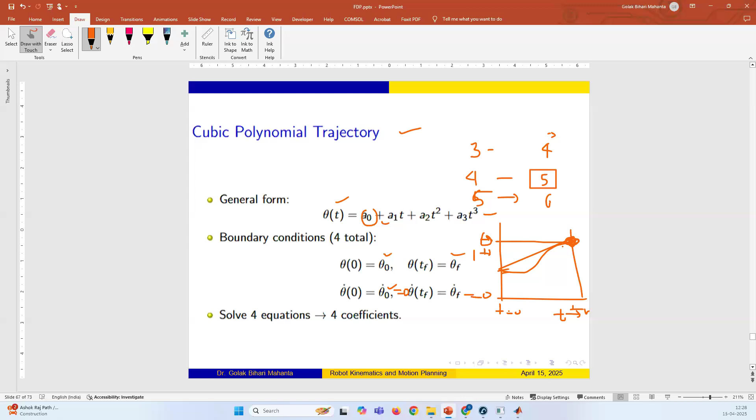But if you add initial acceleration, it means it is going in acceleration, and you don't have a condition to satisfy for final acceleration. So you are not able to solve it, because your final thing will not be zero, it will be having some value. So while it is stopping, it will definitely get a lot of jerk. So generally we don't use fourth order polynomial to generate the trajectory. That's the reason this is also an important case they used to ask.

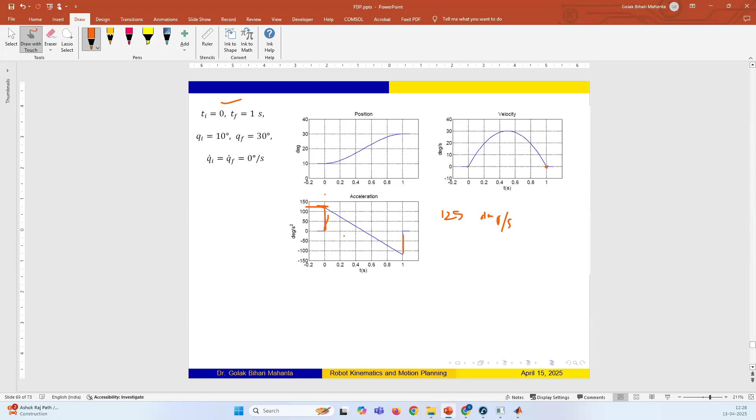The curve will be like this, it is starting suddenly. In the previous case, it is starting suddenly at zero only, when time is zero it is going up to this value, and again at the end, it is going suddenly to zero. So this polynomial is not suitable whenever you need something like a straight line kind of thing; for other steps you need this one, sudden travel and other steps. But in the other case, you don't need this one.

Then trapezoidal profile is also there. So trapezoidal profile is also there, but this depends upon the application you can use, you cannot use it generally.

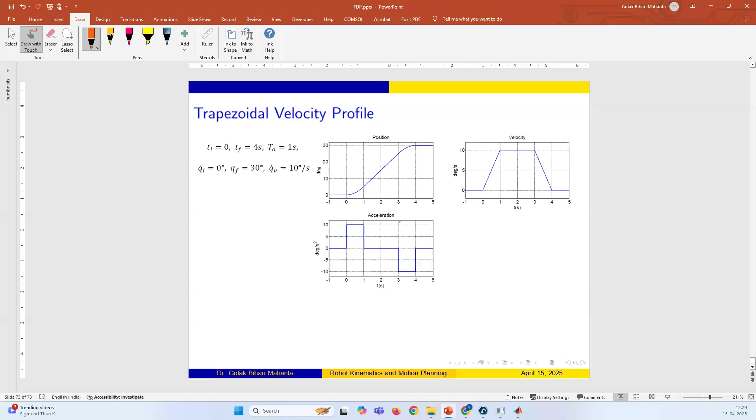So these are most of the things related to today's session. But I went a little bit fast, so I'll stop it here. Anyone having any query, you can ask me.